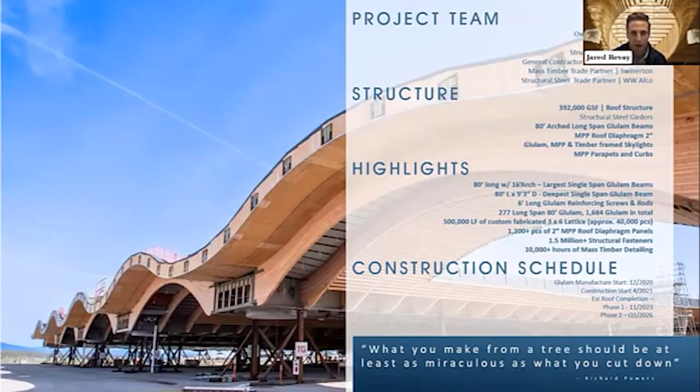The project started with manufacturing in 2020, but we started on the project back in 2019 as the mass timber trade partner, helping to get through the design development with the design team and to do a lot of mock-up testing and evaluating the details for the project to make sure this roof can be what it is today.

And to talk a little bit about the design, which was designed by ZGF Architects, it really started from a place of how does the airport and the construction team keep this airport operational 100% of the time during construction. It was the port's intent to not affect the operations in any way during this construction.

So that meant that you couldn't stick build a roof over the existing building because you'd have a giant crane up there all the time and that would impact flights. And so that's where the idea came of creating modules that would slide into place one by one to not disrupt traffic, and that could be done in the middle of the night when planes are not taking off.

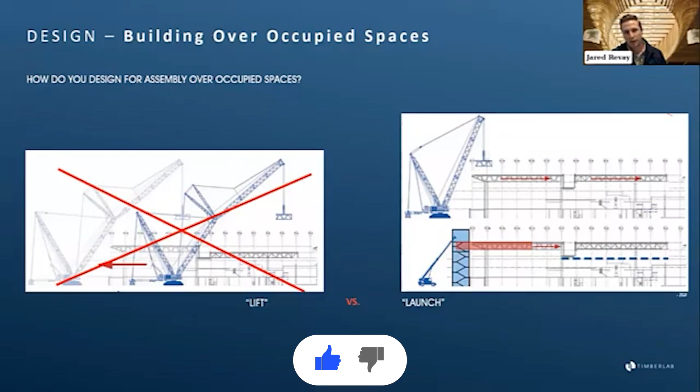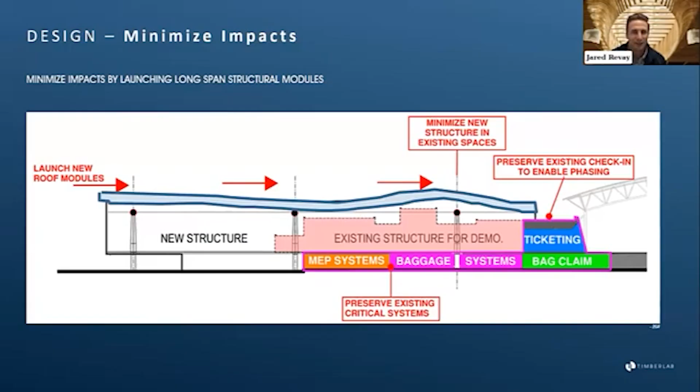And this was going to get torn down, a new roof getting moved in, and then a new whole terminal core being built above it. So it's quite a complex project to take on, and it took a lot of meetings and detailing and planning to figure out how to do it. And we played the mass timber part of this building.

What the building was prior to this roof: this roof was made of many different expansions over many decades and had over 1,000 columns inside of it. Today, the roof sits on only 34 columns. So you have 9 acres sitting on only 34 columns, if you can imagine that.

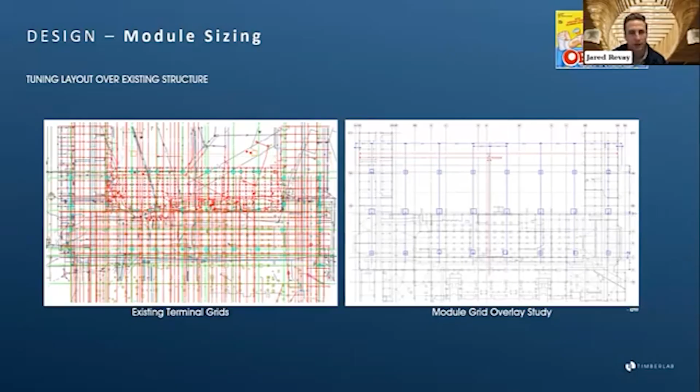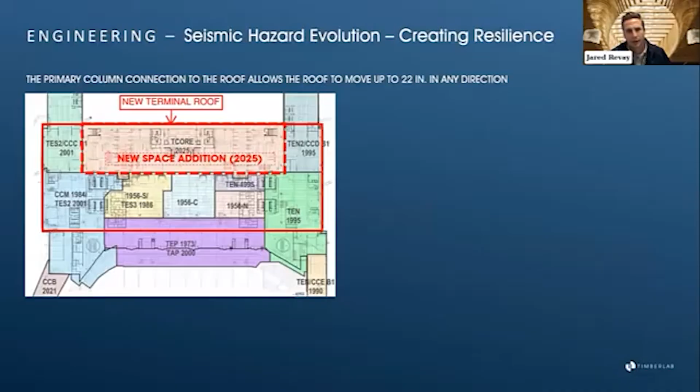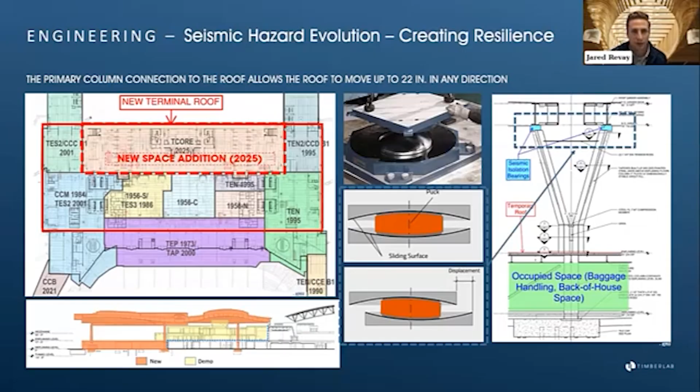On the engineering side, we did a lot of testing at the front end of the project to develop what could be a simple, repeatable connection type. And the engineering for the cassettes would sit on those 34 columns I mentioned, and those columns secured the roof to be seismically isolated from the rest of the building, while at the top of those columns, there's a seismic isolation bearing where the roof can move up to 22 inches in any direction in isolation of the rest of the building. So it's a pretty unique structural detail that KPFF created there.

On the engineering side, it was all in a pursuit of how do we make this building as a prefabricated kit of parts that would be built out on the airfield and then broken apart into modules so that it became modular and then brought back together. And that started with planning out the airfield side where these would be built and creating spaces large enough to build them. So we built the main terminal core on one pad, and then these other pads created the post-security areas that were on the sides of the main core.

And the concrete in which it was set on was all built without rebar in it, so that concrete can get recycled and put back into the airport somewhere else later on. And the idea behind doing this was not only to not disrupt operations at the airport, but to minimize the risk of safety incidents, to bring a roof down from what's at its height today of 60 plus feet in some areas inside the terminal with a lot of obstacles to get around.

This roof was built at 13 feet off the ground out on the prefab yard. So it made it really easy to access for the craft and made it a much safer condition to work in. So it was like one of the most ideal conditions to work in for craft, not only because it's low, but also because once we got the roof on and we were working on the underside, you're out of the rain for the season, and it was actually a pretty nice place to work at.

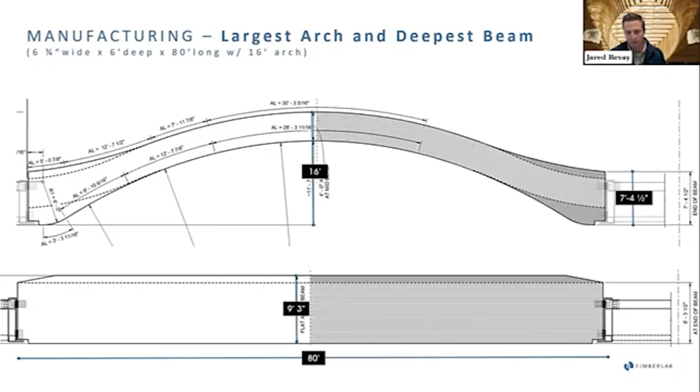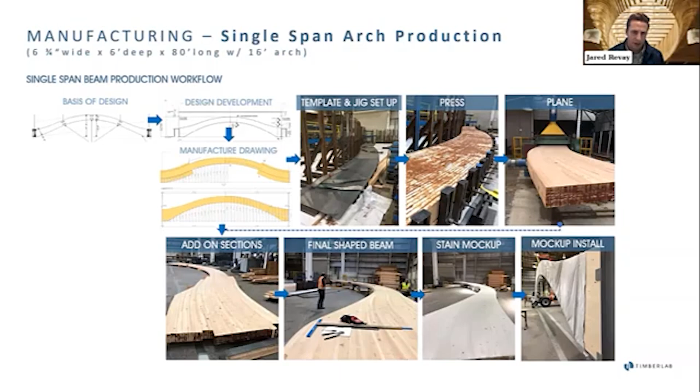And then there was a 9'3" deep beam that's 80 feet long, which was huge for a glulam. And what that process entailed was developing the drawings and the plans to get there, but going a step further and actually making laser cut guided sheet metal shapes to help set up the jig in which these were going to be pressed to ensure we're going to get that exact shape. And following through on those add-on sections, how those sections got cut, then stained, and then this was the mock-up of that install.